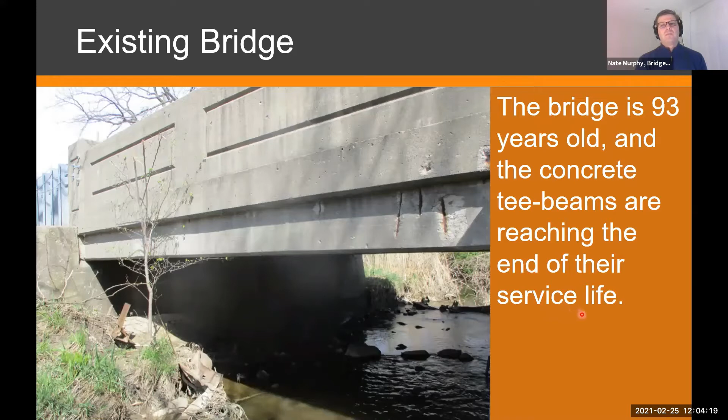Our design for this includes the upgrade - you can see there's a horizontal curve, as we call it, as you enter and turn through this portion of Geddes Road. We will be upgrading that horizontal curve to meet current geometric standards. That includes the cross slope, so as you come around the corner, we will provide the proper cross slope for the diameter of the curve.

That makes for safer travel for the public. As you come through there, you can liken it to a raceway where you have a banked curve - it's similar to that. It'll have approximately 5% cross slope as you go through that area. The cost of the bridge will be approximately $1 million, and again, that is 95% funded by federal monies.

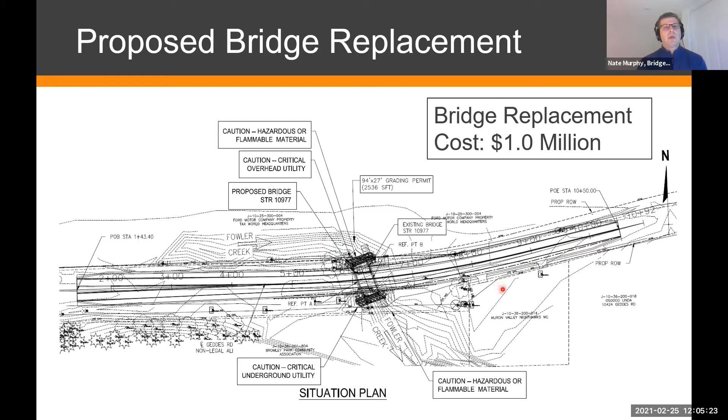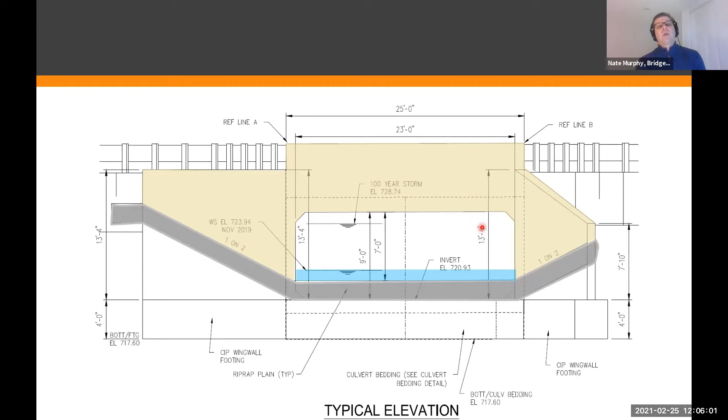We will be replacing the structure with a concrete box structure. This is an elevation - if you were standing down in the stream looking at the side of the bridge, it will have a precast concrete section that will be set in. All these pieces of the bridge are built off-site and trucked in, then placed onto the location with a crane. It aids with the speed of construction and makes for a better product.

Again, here is a cross section of the road. If you're looking in the easterly direction, the slope will be going up at 5%, which gives you a safer curve for traveling through that area. Below that, in the tan, you can see all the precast elements that will be brought in and set in place.

We did a similar project last year over on Miller Road, and we were able to visit the plant where we're making the elements for the box culvert. It was a very interesting site visit - we got to see the pieces actually being made for our project. Here's some of our staff walking through their yard.

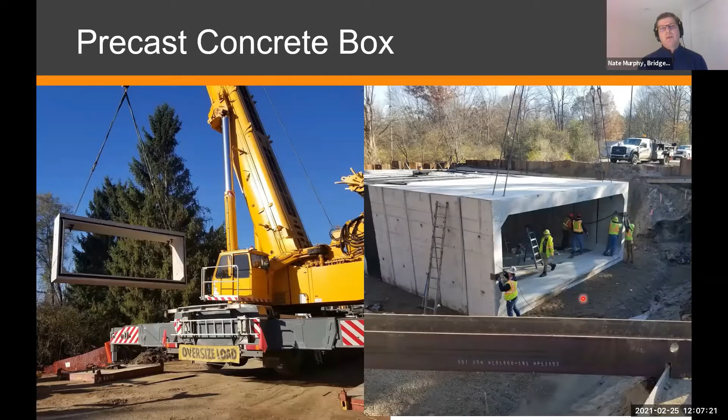After they fabricate it in the yard, they send it on trucks out to the site, and with a large crane they place the segments down into the hole. They're put together and connected, creating the opening for the stream to run through.

In addition, we also have precast concrete headwalls that will go on - you can see this one being lifted on here. They set them onto the end of the box, and it's all bolted together. Here's a picture of them once both have been placed onto the box.

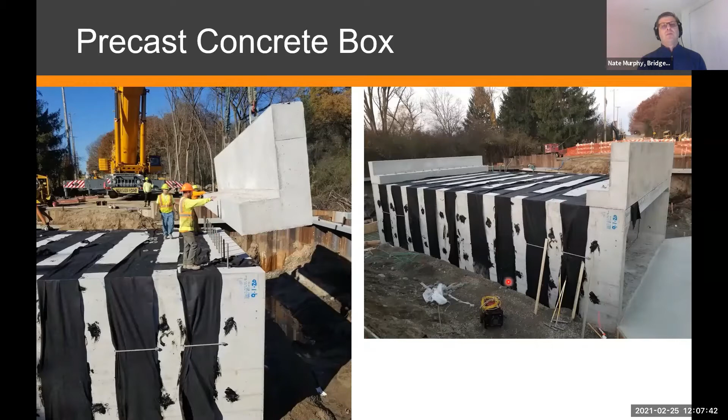After the precasts are in, they pour an apron to reduce the amount of scour. As the water runs through the culvert, it tends to want to wash out at the entrances, so we put these aprons in to provide protection for the soil underneath. That will be placed in the next stage.

We also have precast wing walls that will go on. This is the bridge over on Miller that we placed last year - very similar in size and look to what we'll be doing here at the Geddes location. The precast wing walls have been placed here along with the stone riprap on the outside of the walls.

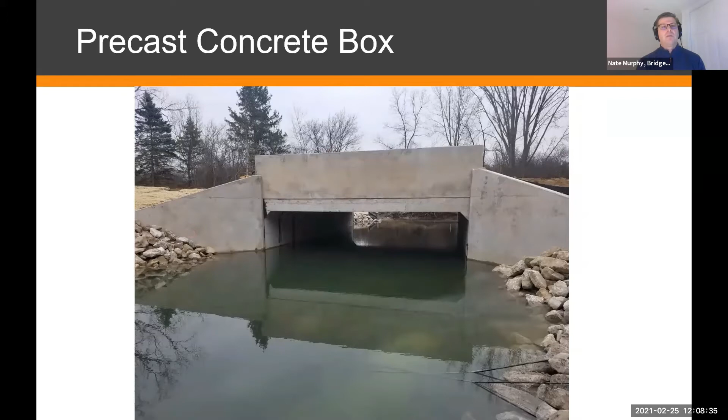So I just want to talk a minute about timeline. This project is subject to the EGLE requirements for being in the stream. We do have a contract awarded to E.T. MacKenzie - they're out of Ann Arbor, our contractor that will be constructing this. Construction will begin in mid-June with the closure of the structure.

EGLE, the environmental requirements, limit us from being in the stream until after July 1, so that's when we will begin setting up. We'll be in there mid-June to begin the project, and we have a completion date of around the end of October.

As I mentioned, we did have environmental considerations we had to follow. The trees have to be removed in time for bat roosting so we don't impact any protected species there. We'll be out there in March just to get the trees down - that should not impede traffic, but for maybe a day or two. The real closure will begin in mid-June.

We do have some ongoing utility relocations as well. You might see some vehicles out there from DTE and AT&T - they have some overhead lines along the north side of the bridge. We'll be relocating those to get them out of the way so that we can bring in the crane and set the pieces we need.

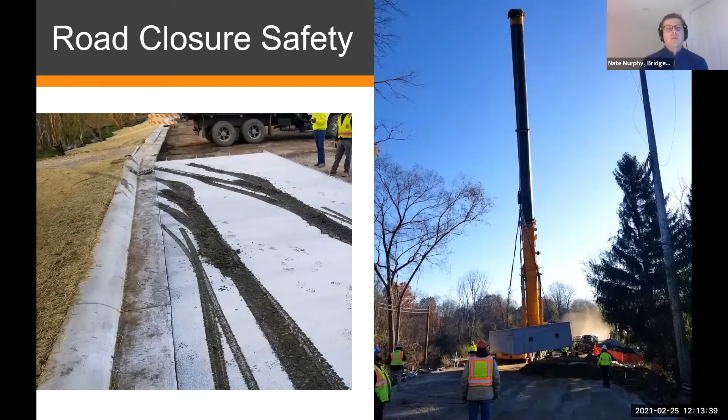Project coordination: we do have some projects that will be going concurrent, at least in this construction year. Most notably, this portion of Geddes will get a mill and overlay, a pulverize and overlay, scheduled for late April. We hope that it will not intersect with the bridge road closure.

Here's our bridge, shown by the green dot. As I said, this one will begin middle to late June for the bridge work, so they won't overlap. Just so you're aware of other projects going on this year.

It's shown here, and you can see this map on our website.

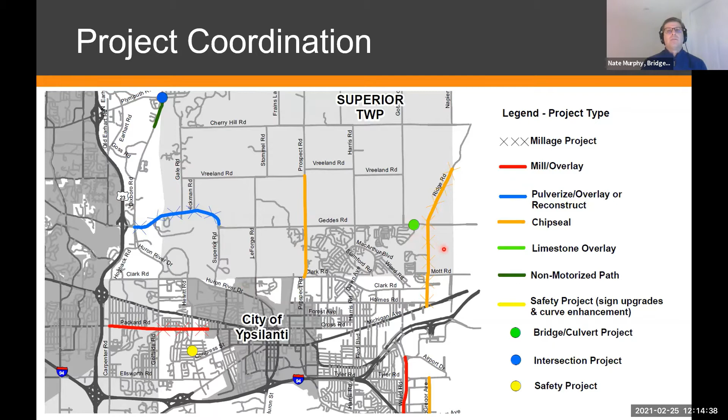And I think with that, here's my contact information. If you need anything or would like further information, I'm happy to help you in any way I can, and we'll look forward to working through anything that you have.

So Aaron, if you have anything else you'd like to add, let me know. Certainly, I appreciate that, Nate.

My name is Aaron Burkholtz. I work with Nate in the engineering department. Nate will be the primary point of contact for this bridge project. I'm the engineer of record. As Nate mentioned, the replacement of the Geddes Road Bridge is being funded through federal dollars. As such, I'm listed as the engineer of record with the Michigan Department of Transportation. But by and large, Nate will be the lead for the Road Commission on this bridge replacement project. I'm always there to assist Nate or respond to any questions any of you might have.

A couple of items I'll touch on: Nate mentioned the existing bridge structure is 93 years old. You might have noticed in the picture, even in its current condition, it's a credit to the workmanship of those who built this bridge nearly a century ago. It is not structurally deficient. Many of our bridge replacement projects have a weight limitation, but this bridge does not, again a credit to those who built it.

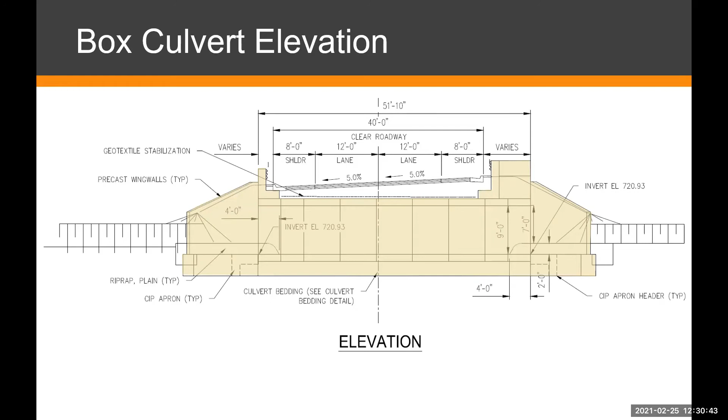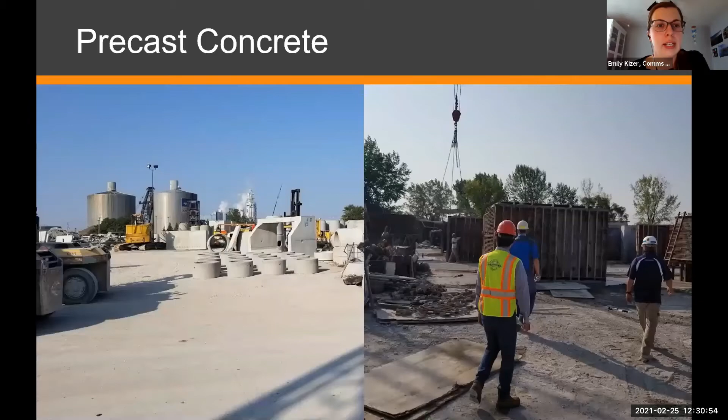Perfect. And is it Jay? Is that your name? I'm sorry, it's John. John, okay. Yes. John, if you want to reach out, we've got Nate's contact information, he'll show that slide shortly. It's also on the website. If you want to reach out to Nate, or you can message me as the host, I can share that with Nate after the meeting. Sure, but we can certainly talk with you further. Did you have another question?

I think I had questions about start and end date, but you guys already answered that. And just thinking down the road, the bulk of our communication will be to parents for the new school year. As we get toward the end of August, beginning of September, that's when we're going to be really impacted by this project. So just understood, okay, too.

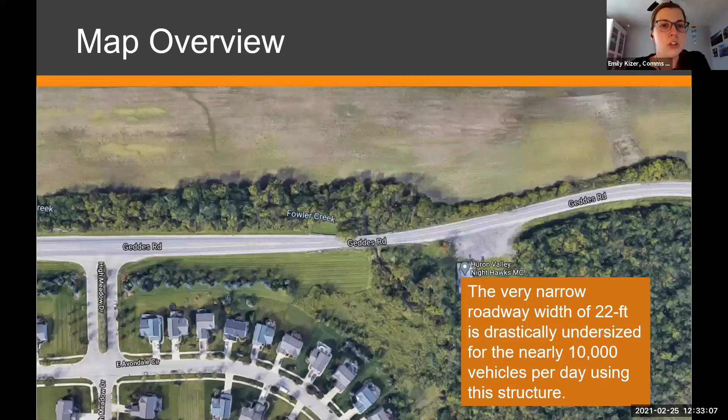Shannon asked Nate, how much wider from the current bridge will the new one be? The existing bridge has two 11-foot lanes, and in that picture I'd shown earlier, the paint for the lane is right up next to the edge of the concrete barrier. We are going to two 12-foot lanes with an 8-foot shoulder on either side. The shoulder width is dictated by the amount of traffic that goes through there and the geometrics of that roadway. So in this case, we went with the 8-foot shoulder. That will make it feel much more open, and you probably won't even notice that you're going over a bridge.

So Nate, it looks like on this that it's 51 feet wide, right? Is that fair? 40 feet is the clear roadway. You can see here - oh yeah, that's why I'm not an engineer. So we have 8-foot shoulders on either side, and then two 12-foot lanes. Do you know what the existing bridge is? I believe it's around 22 feet clear roadway.

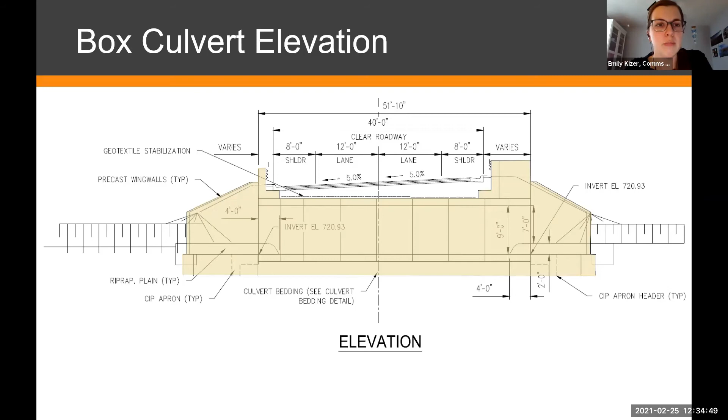Okay, thank you for that. So our next question is from Michael. He says, as a local resident, he's very excited for the bridge, which is great, and that he agrees with the stress going onto the bridge with it being narrower right now. His question is what traffic considerations are being made specifically at the blinker at Clark and Ridge - left-hand turn onto Clark for PM rush, and then right left turn light at Prospect and Geddes for AM. What are the plans to try to deal with those signals as traffic is settling itself into this closure?

I'll say thank you for the question, it's a very good question. We're fortunate that following this detour, if we're coming from the west and coming eastbound, we have the traffic signal at Prospect and Geddes, and then we also have the traffic signal at Prospect and East Clark. Those signals, we can work with our traffic and safety group to adjust the timing on them to allow for the increased traffic volumes, because certainly during that PM rush, there's going to be higher than typical traffic volumes using that route. So we can work with our signal technicians to look at the timing of those. And we're fortunate that we have a roundabout over at Ridge and Geddes, because one of the advantages of roundabouts is that it allows for greater traffic volumes - it efficiently moves that traffic. So we're fortunate to have that roundabout adjacent to the school.

The tough intersection is going to be Clark and Ridge. As you noted, right now there's just a flasher there, and the stop control is on Clark Road. So we're going to have to discuss the situation with our traffic and safety staff to see what might be able to be accommodated there to better facilitate a heavier PM movement as traffic comes down Clark Road eastbound and wants to turn left and go northbound on Ridge Road. So again, a very pertinent question and something we will be following up on. And I want to note too, Michael, it is always challenging the first couple days of a closure as people are getting used to it.

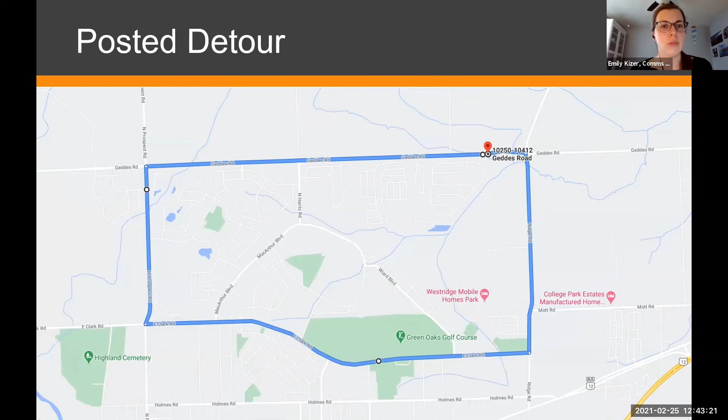Michael had another question about the signals. He asked, will there be some live monitoring of traffic to then create long-term timing of lights? I'm assuming he's talking about during the construction project - how do we do that? And I've got to warn you, Michael, you're talking to 2 bridge engineers. We have traffic engineers on staff, but Nate and Burke are not them. So Burke, you want to take a stab at that one?

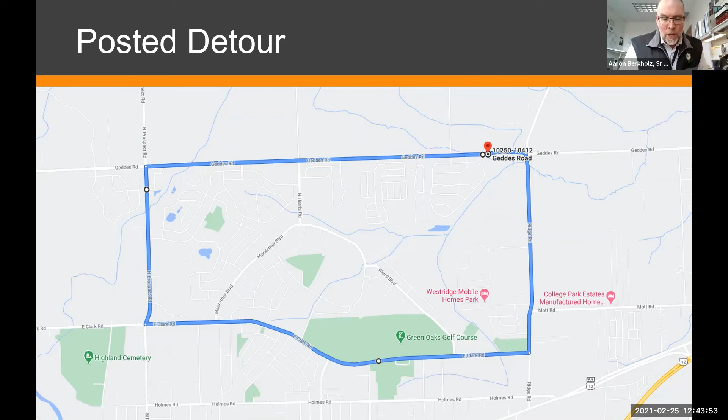Yeah, I appreciate you qualifying that, Emily. Yes, I am not a traffic engineer, I do not claim to be, but I'm fortunate to work with some great traffic engineers here at the Road Commission. Off the cuff, I do not believe we have cameras close enough to these intersection locations for us to remotely monitor the traffic movements. Some intersection locations, particularly in a more urban area such as the Carpenter Road corridor, we do have cameras to assist with live monitoring of traffic movements and volumes. This part of the county, I would not envision the signalized intersections here have that type of equipment.

So what we will need to do is monitor it from the time we close the road, and then essentially have staff in the field. The individual who will be the lead inspector on this project will be on the job. By and large, anytime there is a contractor working on this project, we have an inspector there. He is the eyes and ears for Nate and I, and that would be something he can be aware of and pay attention to as we set that closure up.

And as Emily mentioned, as we allow traffic to somewhat normalize after that closure, we can start to work with our traffic and safety group and with our traffic signal technicians to adjust the timing as we might need to. Sometimes there's a tendency to be reactionary, and after we put a closure up there's a cry for please change it today or tomorrow, do it right now. But oftentimes there is some normalization within just a couple, 3 days, where motorists find another route based on where they're coming from and where they're going to. They will determine the best route for them.